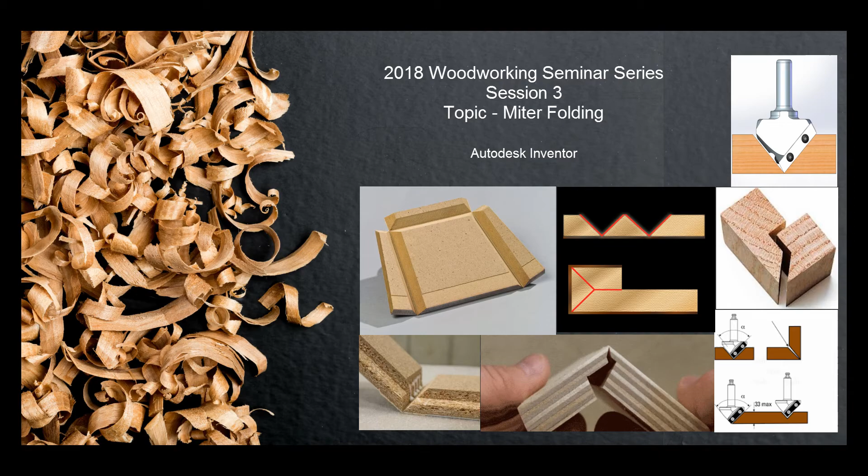Several years ago, I was asked to do a presentation on miter folding at one of the workshops. At that point, because of the earlier releases of Inventor, it was not as capable as it is today. Today I'm using Inventor 2018, whether it's professional or premium, it doesn't matter. In fact, this will work all the way down to 2015, I do believe.

And of course, now that 2019's out, again, it will work with 2019. The method I'm going to use is solid body modeling, because the end result is still going to be a single part that we want to machine.

The first type of miter folding I'm going to do is a straight 45-degree miter. When we start out, we have to make certain decisions, and I would say the most important one is the ability to be totally variable with information, so that whatever the condition comes about, we'll have the capability of changing it, modifying it, manipulating it.

So I'm going to start with 3 rectangles, and this will simulate the end grain, looking at the end grain of a single board.

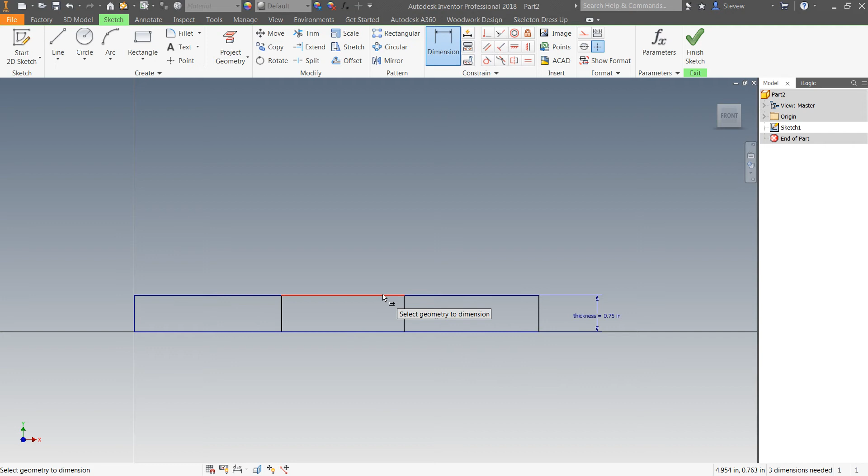Now, because I want to change it, and I'm going to use some iLogic here, I'm going to say thickness equals nominally 0.75, or 3/4 of an inch. I'm going to type in leg 1 equals, say, 3 inches. Leg 2 equals 3 inches. And leg 3 equals 3 inches. So there'll be 3 sections that will be folded on each other.

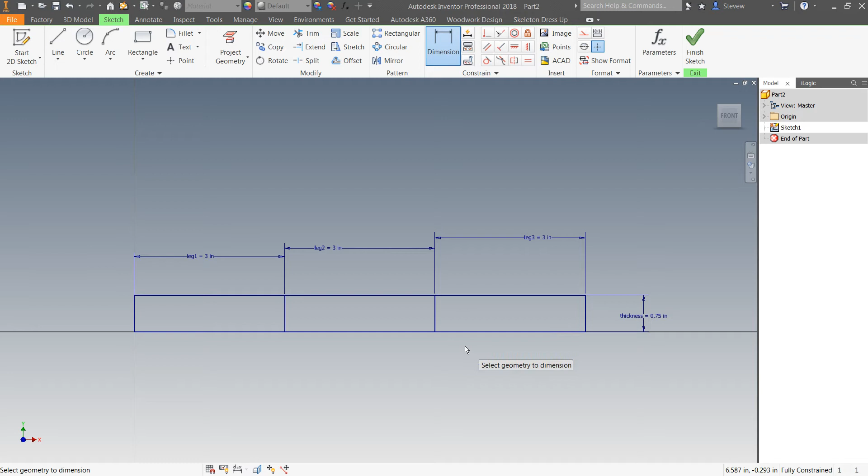That is the intent. I'll look at it in an isometric view or home view, and then extrude, let's say leg 1, and we'll say length equals, let's say 12 inches for the moment.

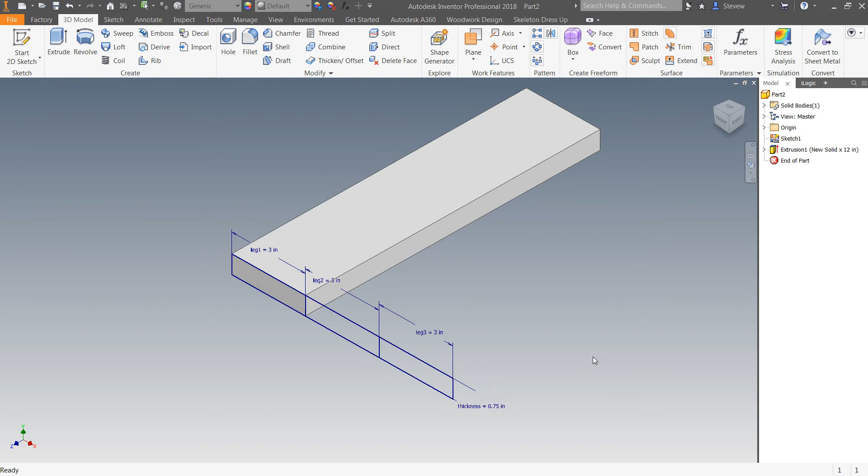I'll click on this and share the sketch and extrude, flip it the other way, use the parameter length, it's a new solid, and pick OK. Then extrude the final one, or leg 3, to length also, and pick OK.

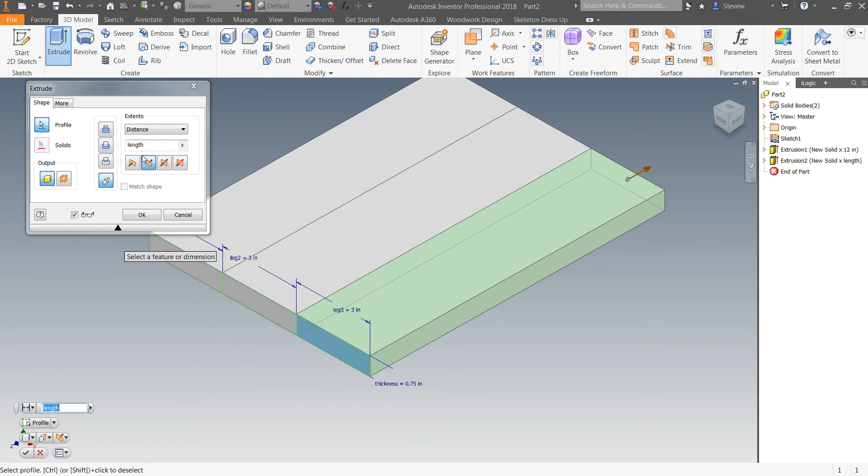So what we have here are three individual pieces of material. Well, really, they're not individual pieces of material. It's three separate solids, but it's one part. As we can see here in the browser, there are three solids, 1, 2, and 3.

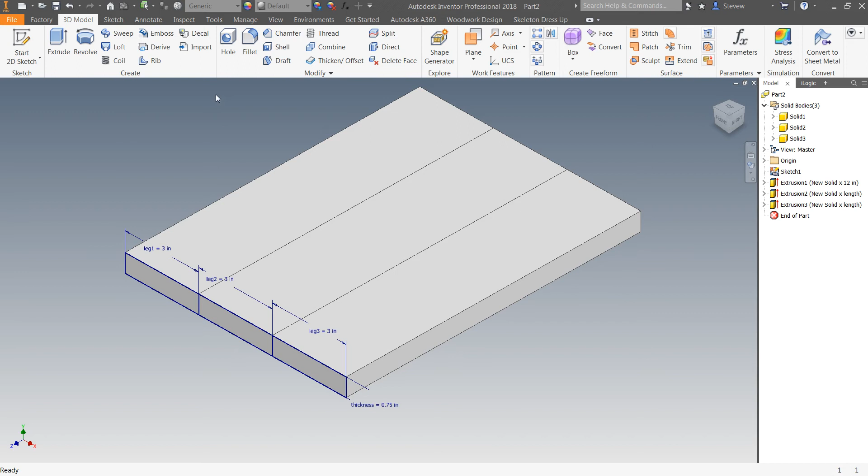One part. I'll also start now adding my angles. So I'm going to say chamfer, edge 1, and we'll chamfer it to thickness so that it will be equal to the thickness of the material, and pick apply, edge 2, and apply, edge 3, apply, and edge 4, and apply.

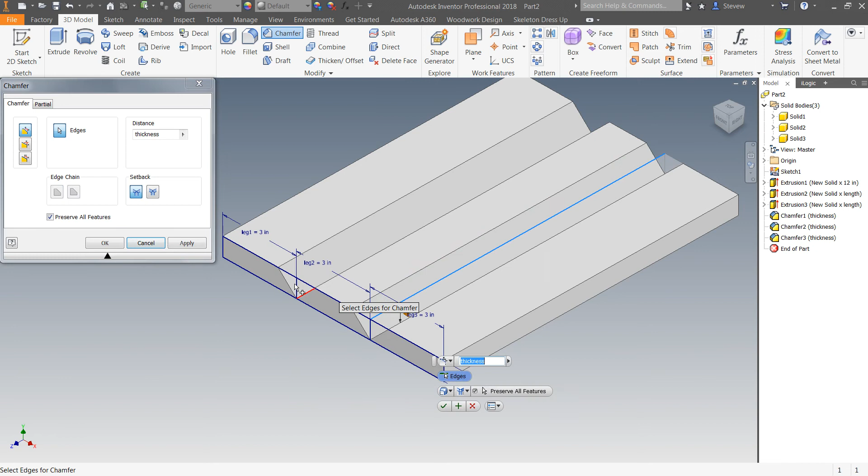And you can now see that we have three separate solid bodies with 45-degree angles, and of course, those are the ones that are going to be folded on each other. If I wanted a true box, then I would have done the outside and probably added a fourth leg.

I'll turn off the sketch, the shared sketch, in the browser, and pick Save, and give it a name. Let's call this Variable Miter Fold, and pick OK.

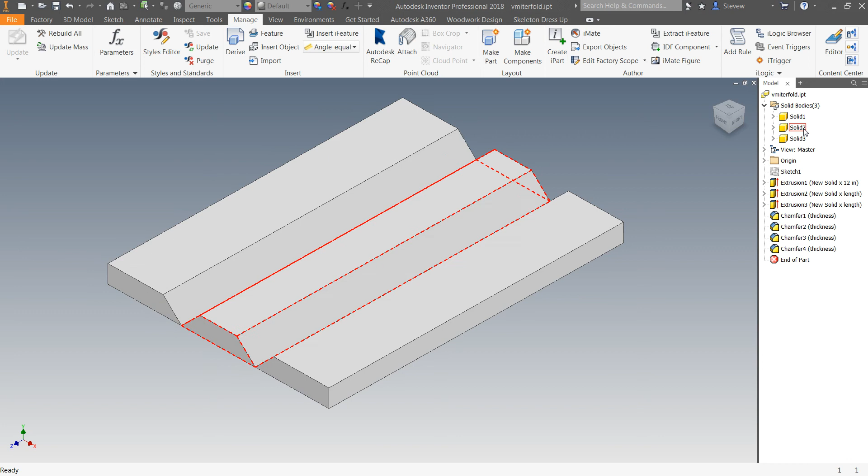My next step is to control what's going on here. So I want to control each of the legs, different lengths. I want to control the thickness of the material, and I want to control the length of the actual item itself here, the part. There are three solid bodies here, as you can see, and they're called solid 1, 2, and 3. Of course, I could rename them leg 1, leg 2, and leg 3.

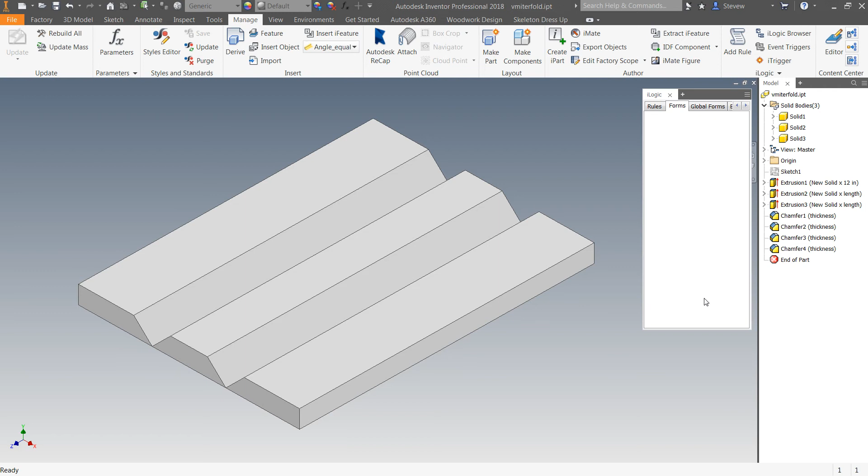Again, your call, based on the way that you might be using Inventor today. But I do want to start managing this, developing, utilizing it, because once I have this, it's going to be a library item that I can pull and utilize at any time for any project. So I'll go into Manage, and I'll go to iLogic, and the iLogic browser pops up. Sometimes the iLogic browser is sitting right on top of the normal browser, so you can see that you can toggle between the two. Now, I'll pull this out of dock so that we can work with this.

I'll go into Forms, right-click and add a form, and you can see here are my variables that I was using previously. So if I highlight my variables and drop them, you can see what has happened is I now have a dialog box that will control each of the items.

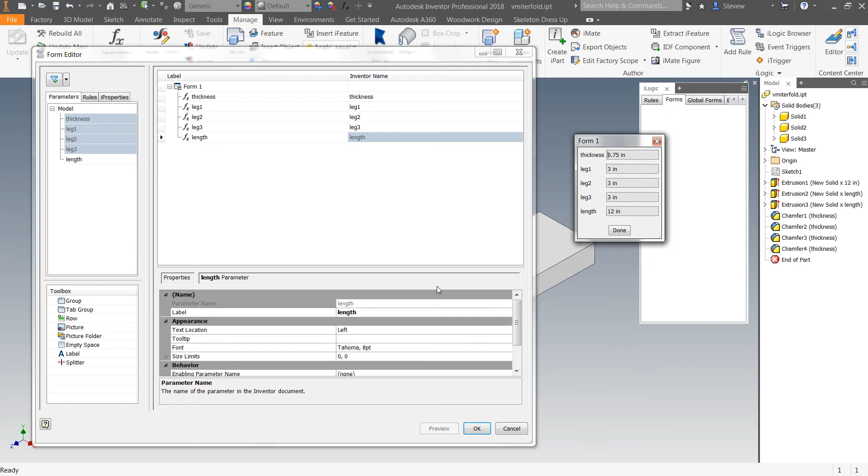Now I'm going to clean it up a little bit because I'm not comfortable with the way it's presenting. So I'll move thickness all the way down. I have leg 1, leg 2, leg 3, length and thickness, and I'll put a splitter after leg 3 so it looks a little bit better. And I pick OK.

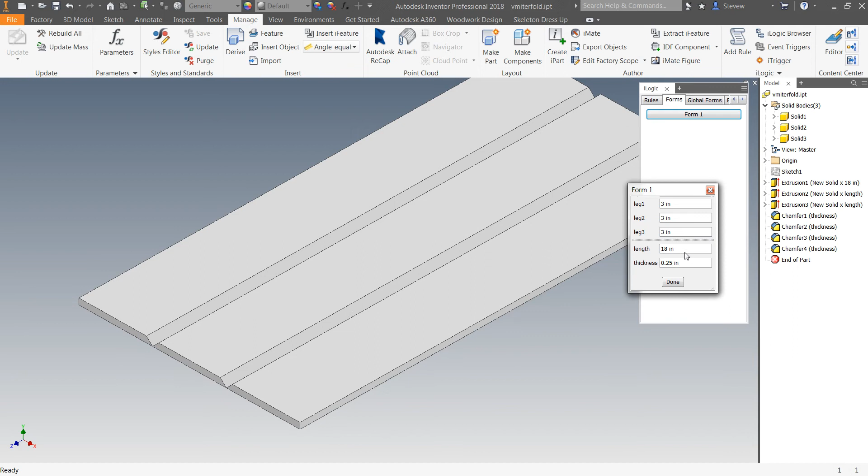And we'll just put it back for the moment. Move it back to 12 and move this to 0.75.

Once we have the actual core modeled, which is this one part that will have 3 legs, we now have to fold up one leg against another, or one solid body against another.

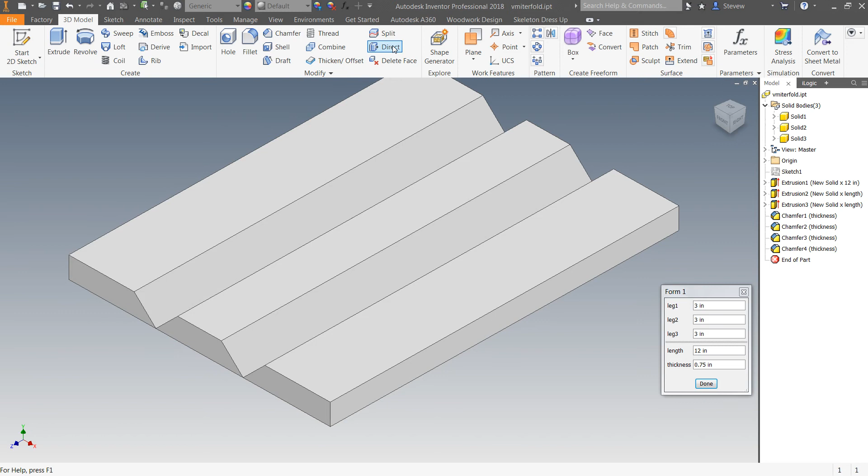The way it's done is simply using Direct Edit. The Direct Edit tool is found under 3D modeling, introduced a number of versions ago, a wonderful tool, and I use it quite often to accomplish tasks that were much more difficult and could only have been done in an assembly.

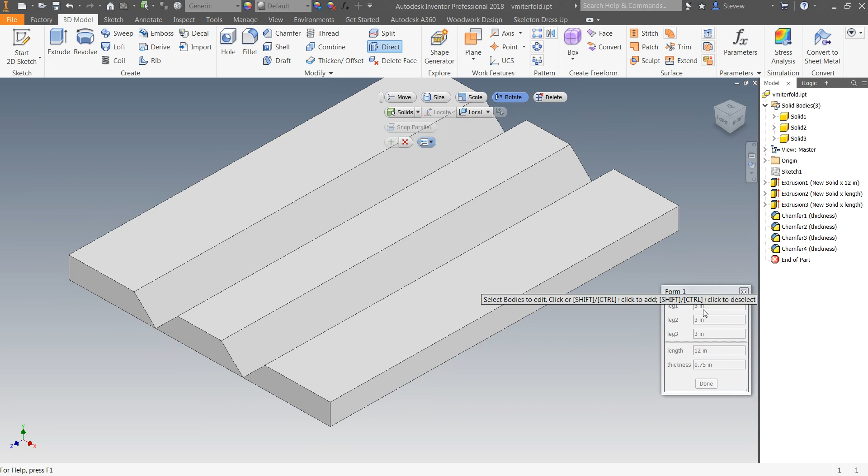So the first thing I'm going to decide upon is which of the solids is going to be stationary and which are going to be movable. In this particular situation, I'm going to just indicate that the middle leg will be the stationary solid. So I pick direct, I'm going to rotate something, and I'm going to rotate a solid rather than a face. I'm going to touch the solid that I want to rotate.

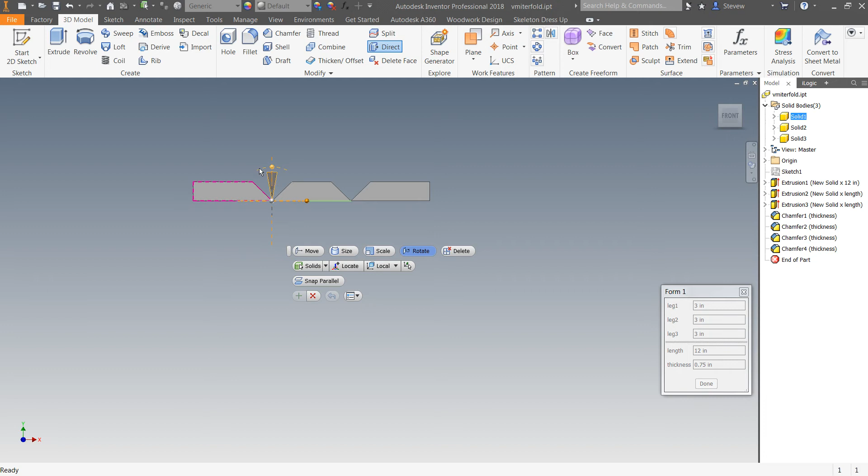I'll look at it from front view, and I'm going to locate the rotation point right at that vertice. Once I've done that, I can move my mouse onto these dashed lines, and they will allow me to just pull with my mouse so I can see I have correctly selected, and I'm going to type in the value that I want and pick OK.

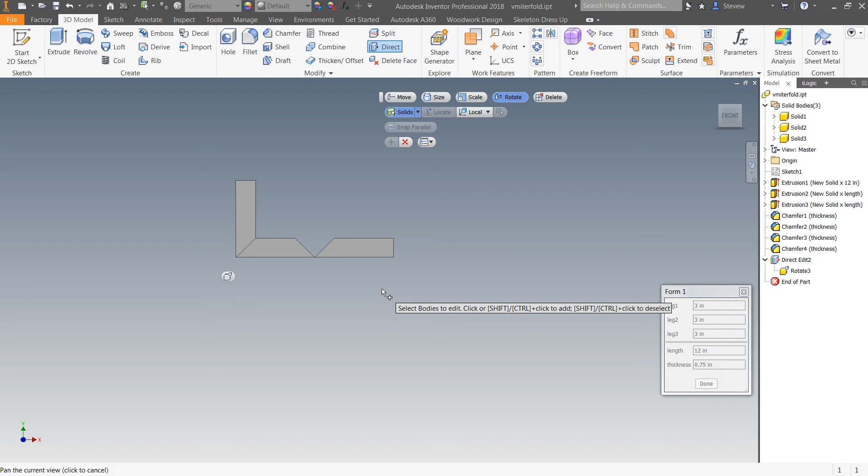Now that value can be a variable, and I can control it if I so desire. I'll go ahead and do exactly the same thing with the other piece. Locate the vertice point and rotate that 90 degrees and pick OK, or hit the plus sign. If I'm done with this, I can hit X and I'm out of the system.

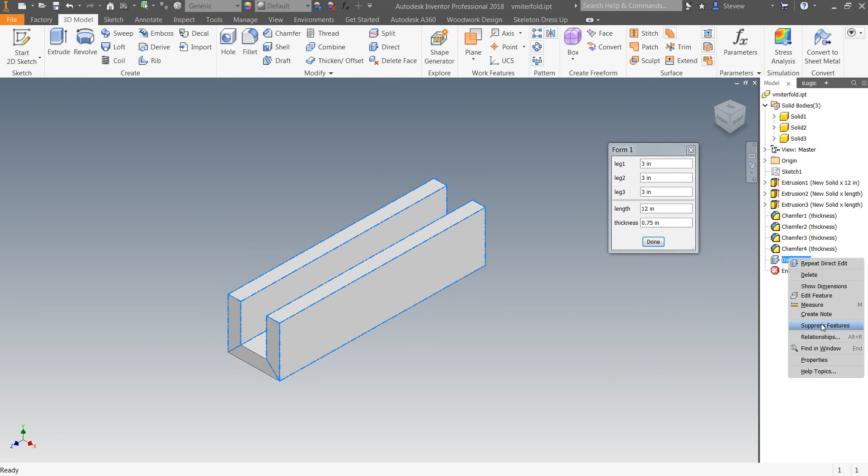Now, to test this, over in the browser you now have something called Direct Edit. If I right click on it and suppress it, it's going to open it up. So you start getting an idea of why I'm doing what I'm doing.

If we go ahead and unsuppress it, and we change the thickness from, let's say, 3/4 to 1/4 inch, you can see that everything works because I'm using the variable thickness on those chamfers.

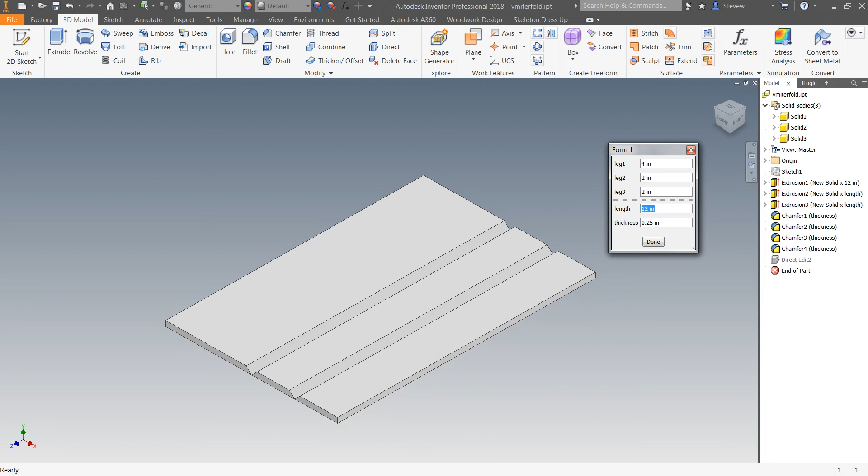If we go ahead and unfold it, like we've done before, and then it's correct. If we change the leg, let's change the center leg from 3 inches to 2 inches. Let's change leg 1 to 4 inches. Let's change leg 3 to 2 inches. You can see that I am changing everything. And then if I want to unsuppress the feature, it is correct.

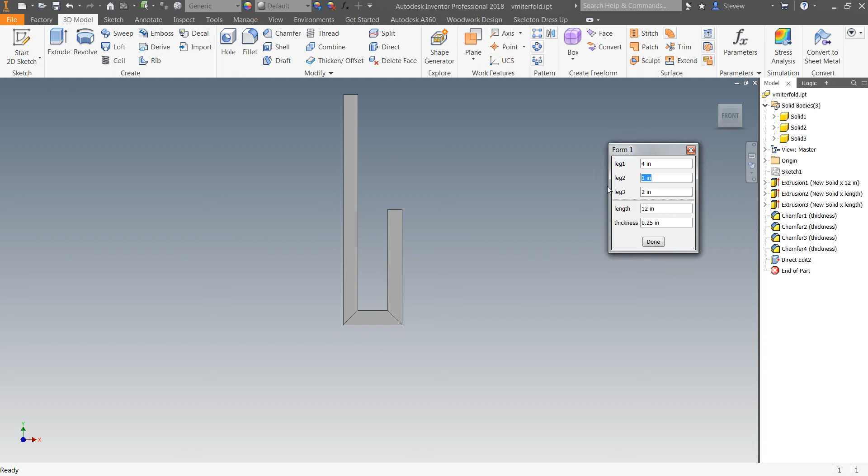In fact, if we take leg 2 and change it to 1 inch, let's go further with this, or change leg 2 to 0.5, I've folded it on itself.

This is one of those methods that we use when we start building with miter folding, because this is a seamless edge. How do I know? Well, you don't see it when everything is gray.

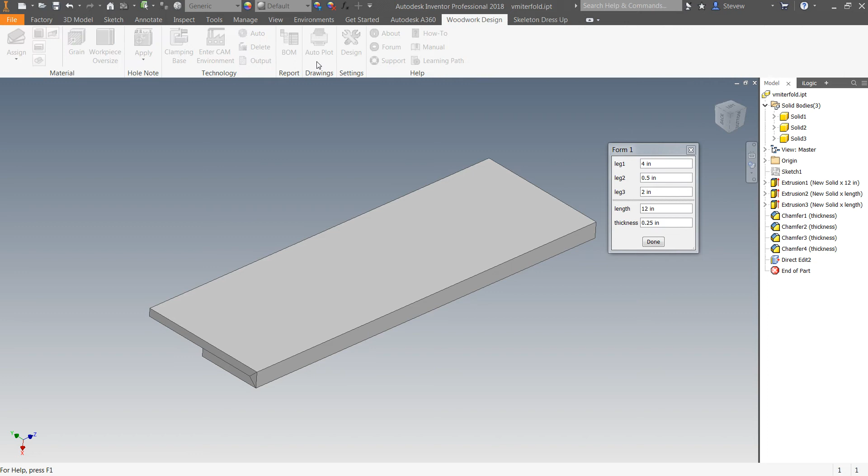Let me save my work, and I'll go into Woodwork Design, and I will assign some material to it. Let's assign bird's eye maple veneer to this.

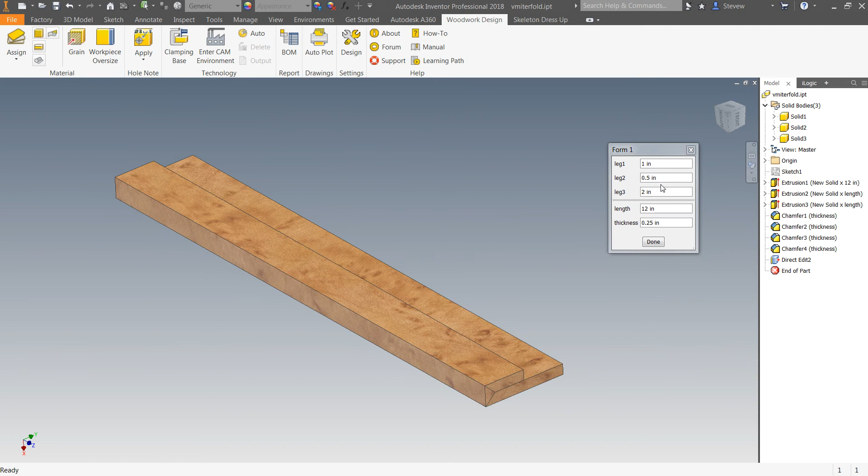This is a standard 45-degree miter fold, but we have many other options of miter folding. We have lock miters that we could implement this way, curved lock miters, spline lock miters. So it really is not too many limitations. What I like to do is show you the method we can implement to take a simple miter of this nature and enhance it even further.

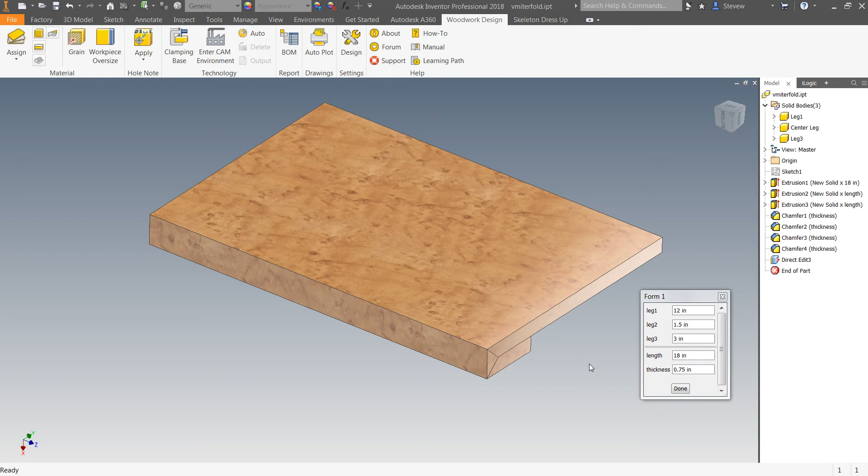So the first thing I'm going to do is put this back to a pretty straightforward 6 by 6 by 6 box, and I'm going to unfold it by suppressing the feature, and we'll come back to that in a little bit.

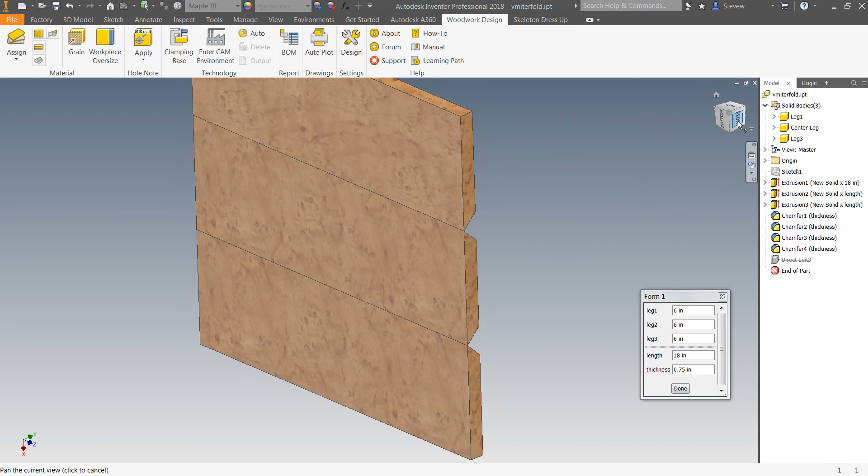So what we have here now is the end grain, and I'm going to consider the possibility of putting in lock miters. To create our lock miters, to start adding a little more surface area for gluing or registration, it's fairly simple. Depending on what your particular company does or what your design does, whether it's decorative, I've seen S-curved lock miters if that detail is going to be shown. There's variations of what one can do. What I'm going to do here is get started by creating my positive and negative shapes.

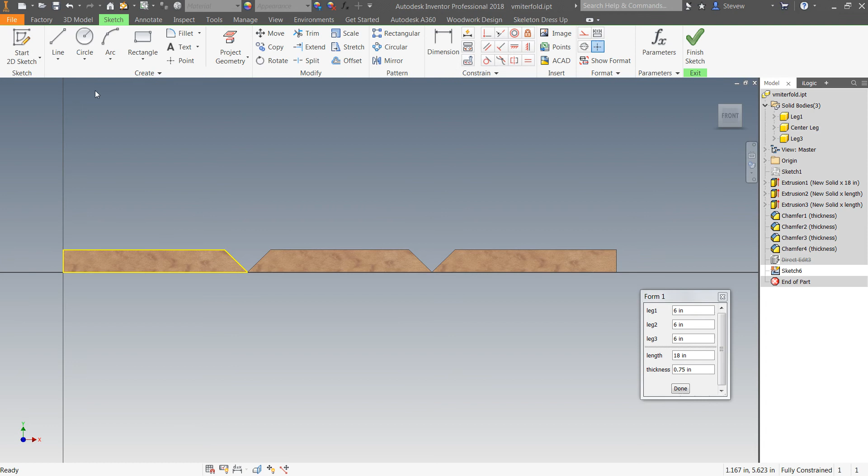So I'm going to create a sketch, and I'm going to draw a line from the midpoint. You can find the midpoint like so. And I'm going to extrude just that piece, and I'm going to cut all the way through the part.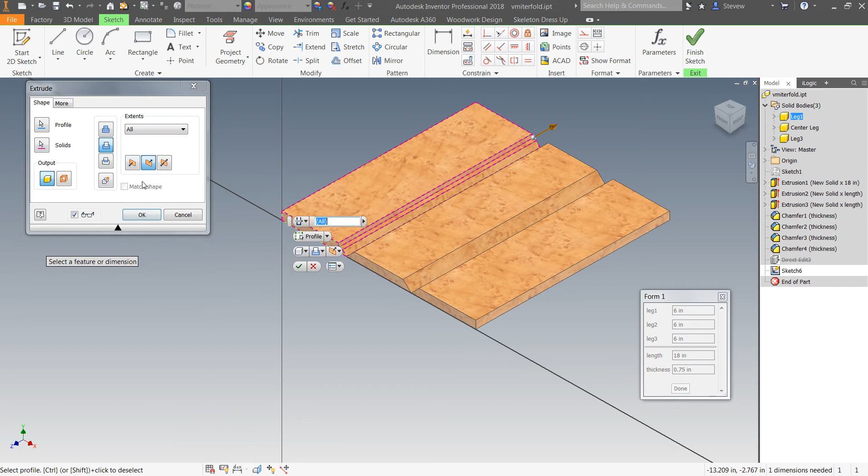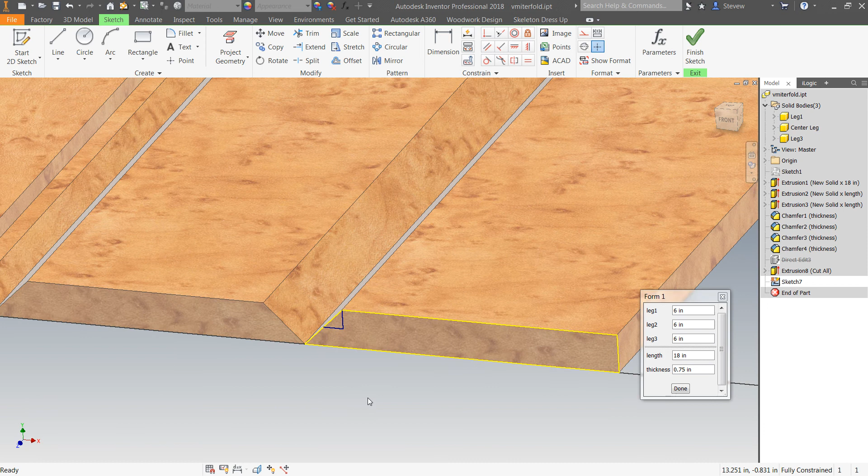I'm going to come over here, sketch on this piece, and draw a line from the midpoint across and up. The reason I'm doing that is because I want it to work no matter what the thickness of the material is, so I'm not even giving it a dimension. All I'm doing is saying midpoint to corner point. I'm going to cut, distance is all, and pick OK.

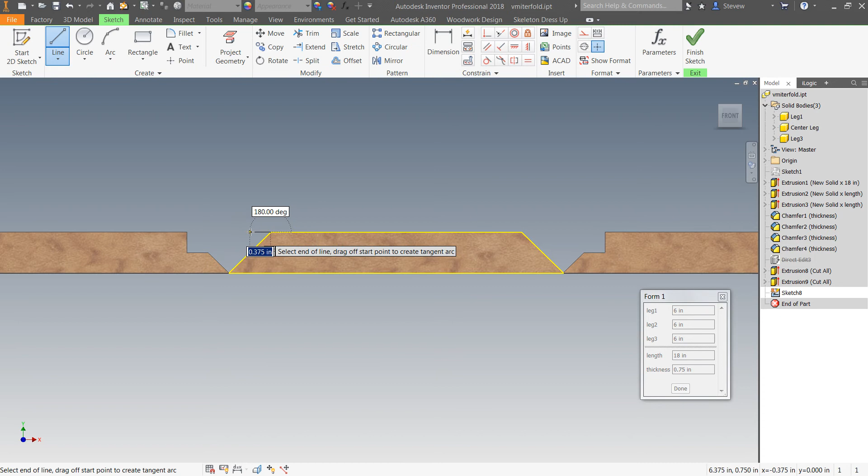So now what I have are the two outside edges. Now let's do the insides. If I go ahead and sketch on the inside, and let's draw a line from here, find the mid, pick, and do exactly the same here.

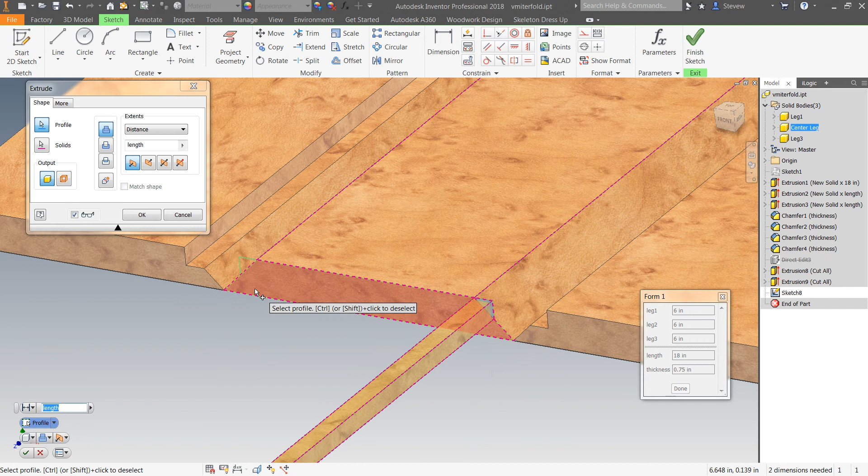Let's go ahead and rotate this around so we can see what I just did. I'm going to extrude this piece and that piece, flip it the other way, tell it the variable length, and pick OK. So these should lock into each other.

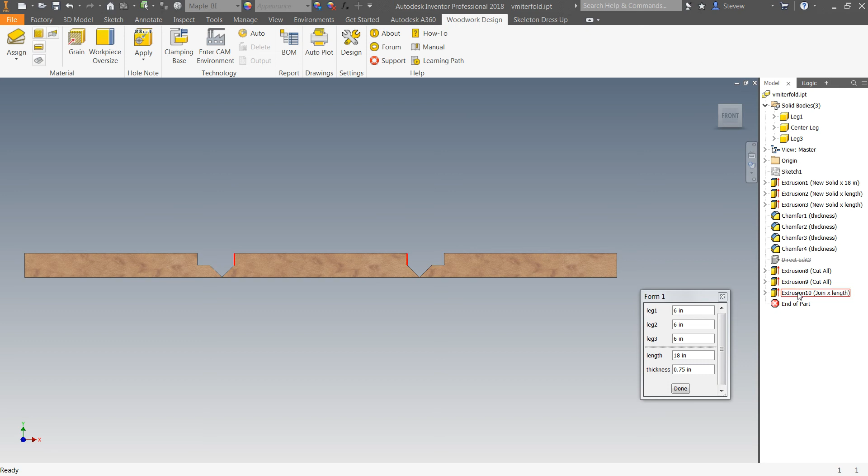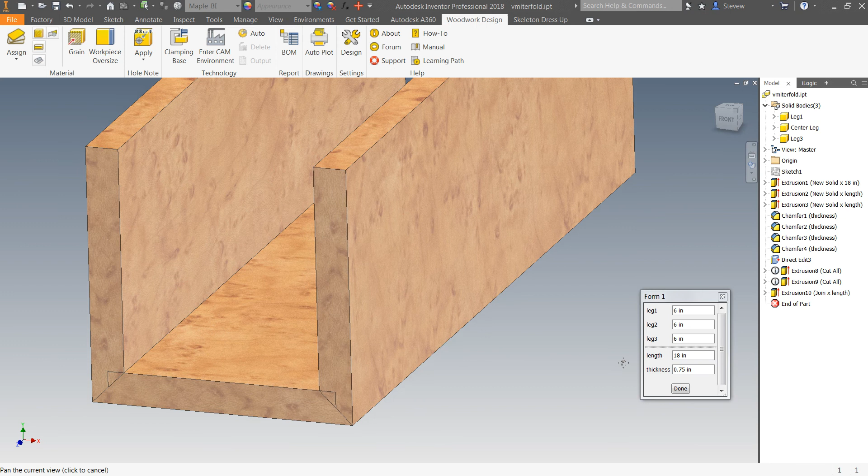Now the method you use here, or whatever the sketch is, that's completely up to you. Let's unsuppress the direct edit. You can see here are the last extrusions, the two cuts, and the one join. If I right click and unsuppress the feature and pick, oh, something's happening, and pick accept, okay, you can see there's some variation here that doesn't look right. You also notice over here there are some exclamation points saying there's a problem. Well, because we did these after it's been folded, that's where the problem comes in.

But if we take these last extrusions and move them up above direct edit, this is all cleaned up. So the order in which you do it is important, and this is just one way to accomplish that task. If we go back to direct edit and unsuppress it, you can see that that works just fine.

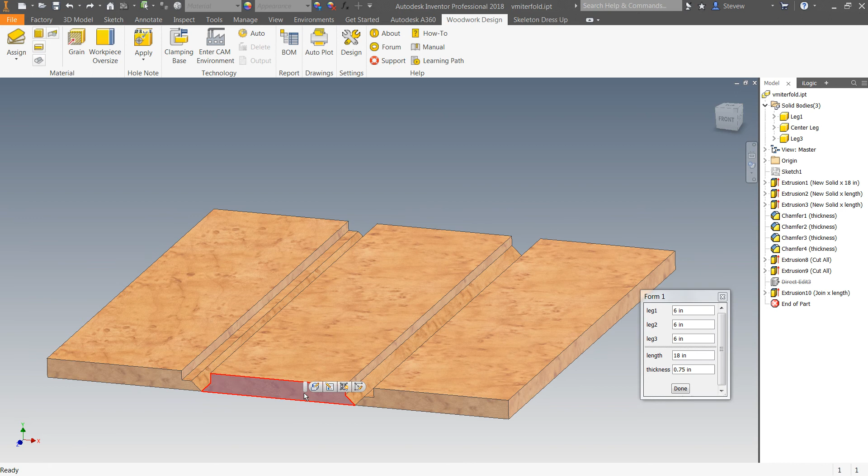I'm going to take this face and just change the appearance so it lights up a little differently. Let's make it black—sorry, let's change that face and make it a different color. Okay, unsuppress. Let's change this a little bit. Let's make leg 2 inches. And you can see what's happening here. And now we have a lock miter.

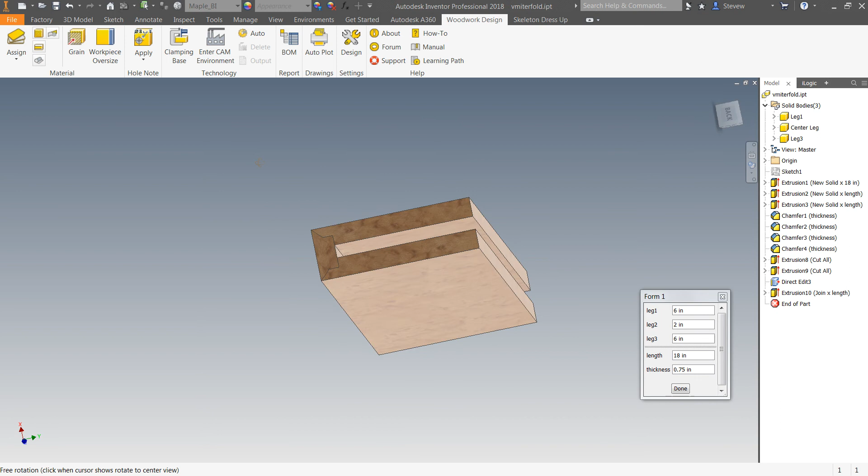I would now like to add the parameter for folding and unfolding right inside of this dialog box, because again, I'm going to want to use this as a library part where I can bring it in, tell it I want it folded or unfolded without going to the browser, so that every one of my team members can then take advantage of this tool. So right now, this is called Direct Edit 3, and maybe what I'm going to do is call this...

Okay, we can give it a different name if we want. We can call it Layout. Give it any name you want, okay? So if I right-click on Layout, I can suppress or unsuppress.

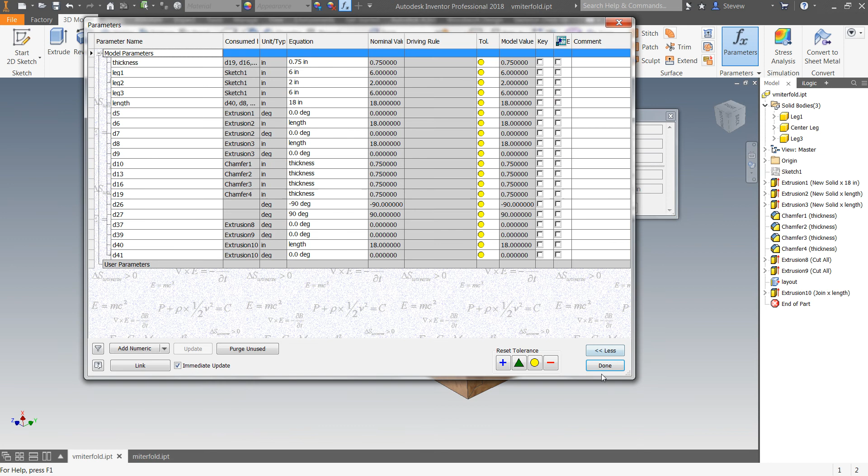Let's now go into parameters. Okay, so let's come back into modeling, go into parameters, and we can see here now what we've been doing. Okay, so thickness, leg 1, leg 2, leg 3, and length, of course, are options here. And what I'm going to do is also make them key fields so they will be able to be used downstream and be prompted for, whereas all these others maybe aren't as critical. But again, this is a choice we can make.

What I'm going to do is add a text field now. And the text field, I'm going to give it a name. I'll call it pattern.

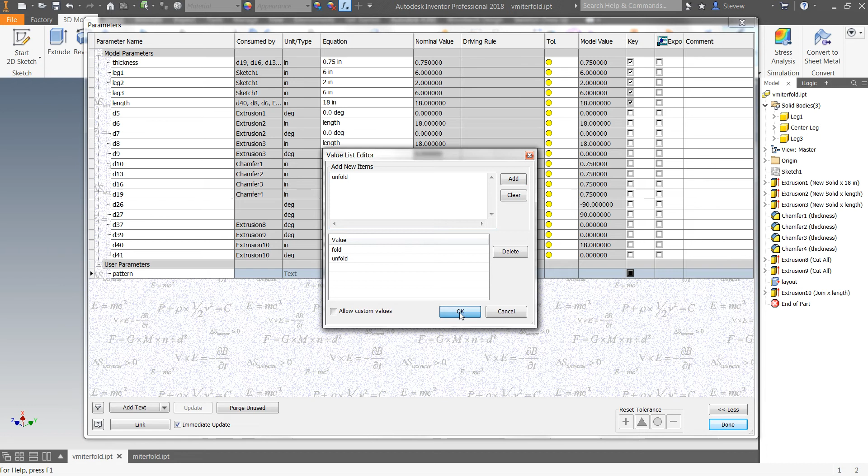I'll give it one option called fold. I'm going to right click and make it a multi-value field, and I'll give it another option called unfold, and pick OK. So now what I have is a parameter called pattern where it's a text field, and there are two options, fold and unfold.

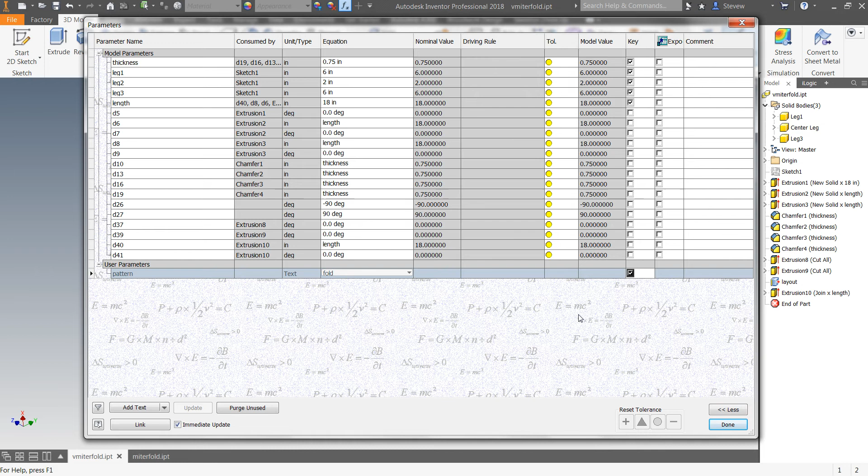Again, case sensitive, be careful here as we go further. Usually for part variables I use lowercase, and for global or assembly variables I use uppercase, but whichever makes the most sense to you as you're working through it. If this is the first time you're seeing this, there are lots and lots of tools. We've done many iLogic presentations in the past. I'll pick done.

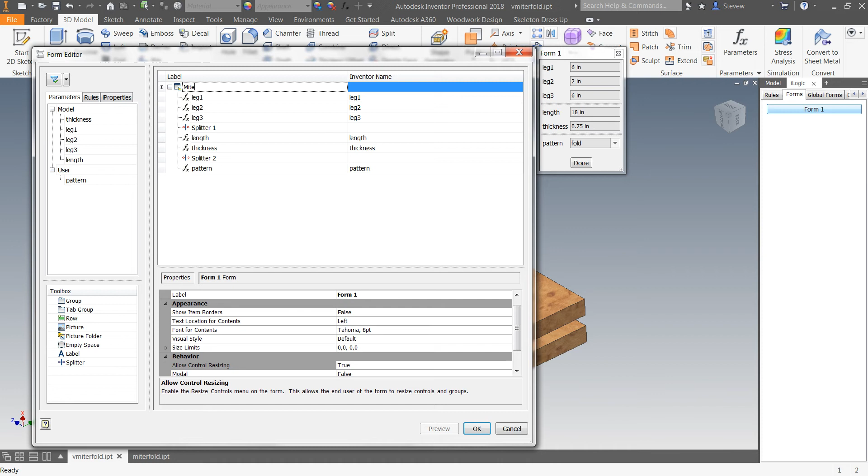Okay, and then if I go into iLogic, go to forms, edit the form, bring pattern in, you can see it's now here. Let's put a splitter above pattern, and let's give the form a name, and let's call it Miter folding. Pick OK. So now you can see it's called Miter folding, and what we have here is an option for fold and unfold, but it's not connected to anything yet, so it's not going to do anything at the moment.

Okay, the next step is to develop a rule associated with this new parameter. So we'll go into iLogic, into rules, right click, and add a rule. I'll call it Miter fold and pick OK. So at this level here, we've done many iLogic presentations, so...

The simplest way of doing this is to use an if-then statement, and I'll say if my expression, which is pattern, that's the variable name, equals one of the options was fold, lowercase, in quotes, then we can come down here and find the layout and say capture. Really all we want, I don't need the angles, but all I really need is to say features active. If pattern equals fold, then features active, and that's here.

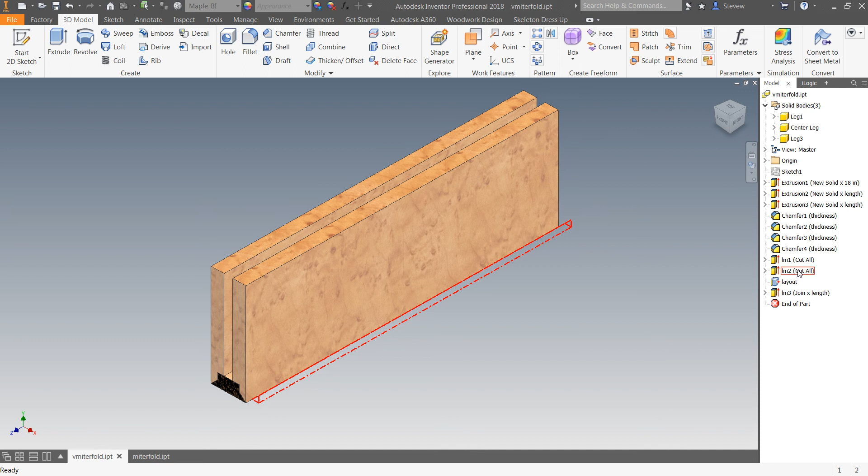LM2, lock miter 2, and LM3. The naming conventions really don't make much of a difference, just as long as you know what they mean. But if I now go over here and suppress these, you can see that the lock miter's gone. So what I want to do then is possibly do a similar situation.

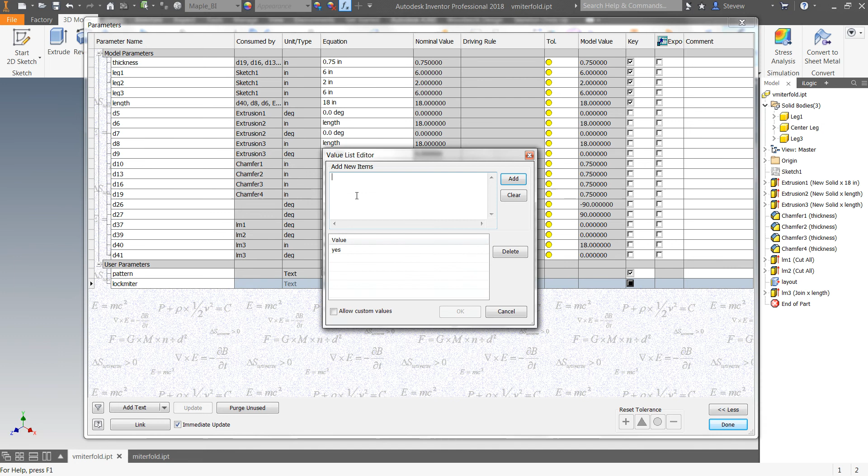So I'll go into parameters, add a text field, and this is going to be lock miter. And I'll say yes. Make it a multi-value field, no. So it's yes, no, and pick OK. So you can see here that now we have this option.

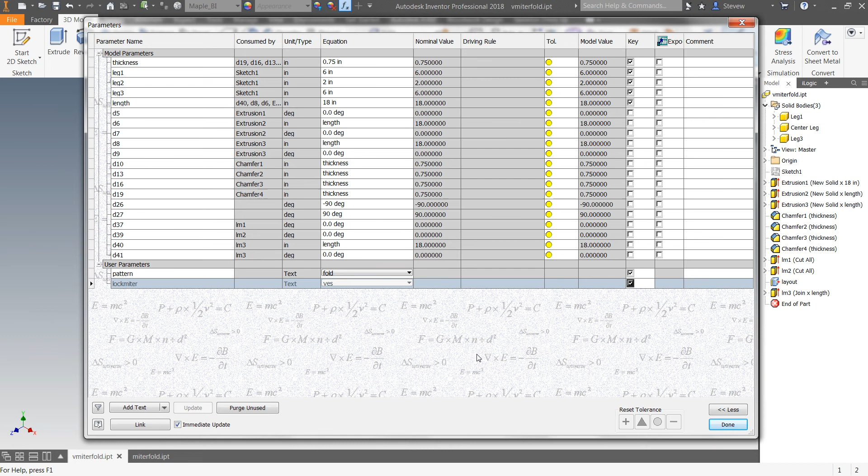Obviously, this could have been a true-false field, but maybe we're going to do some more with this downstream. I'm not sure, but again, there are multiple approaches. I'll pick done. I'll go into iLogic.

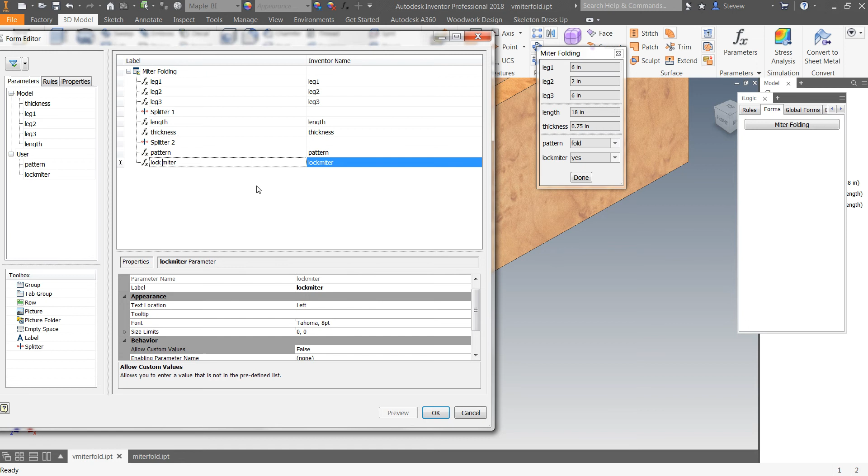I'm going to say go to the form, edit, bring lock miter in, and pick OK. Well, before I pick OK, I want to put a space there, so it looks a little cleaner over here. So now lock miter is an option, but of course it's not hooked to anything yet, so we need to hook it to something. I'll pick done or move on.

Okay, so the next thing is to write the rule. So for this to now be implemented within the dialog box, we have to write a rule. I'm going to create a new rule. I'll call it lock miter.

And similar to what we just did, we'll do an if-then statement. If lock miter equals, obviously you have to use a quote, yes,

Then let's go down to LM1 capture 1, LM2 capture, and LM3 capture. lock miter 1, 2, and 3, which we changed in the browser over here on the right. It puts notes in here, you know, that's what the apostrophe is for. Do we need them? Sometimes it's nice to see where it's coming from, and it helps explain the code a little bit better. I don't need to change some of these other things.

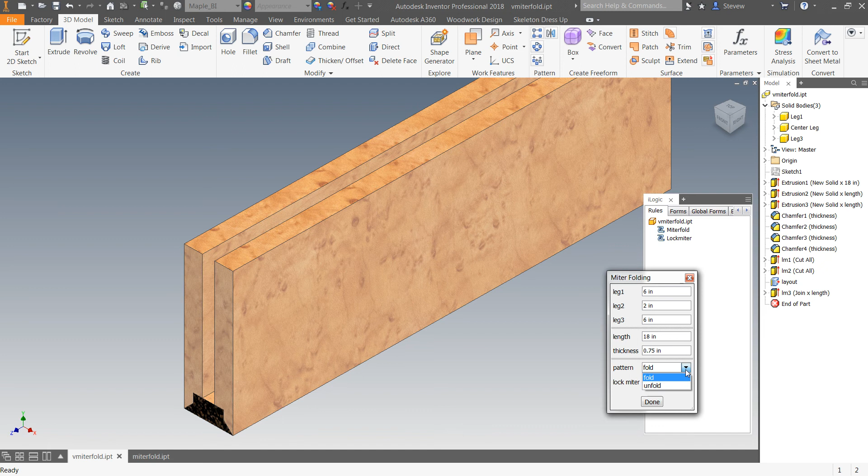Pick Save and Close. So let's see how this works, if it works. Pattern unfold, yes. Fold it. lock miter, no. Yep, lock miter, yes. Unfold. lock miter, no. Works pretty good. Let's back it up and fold it, and pick and save our work.

So now that we've created this, I want to use this in the real world, okay? I want to bring this into cabinets. I want to use this as shelves. I want to use this as rails. I want to use this for whatever purpose we might have. Maybe it's going to be just for columns, simple columns, or for beams, decorative beams. Hundreds and hundreds of uses.

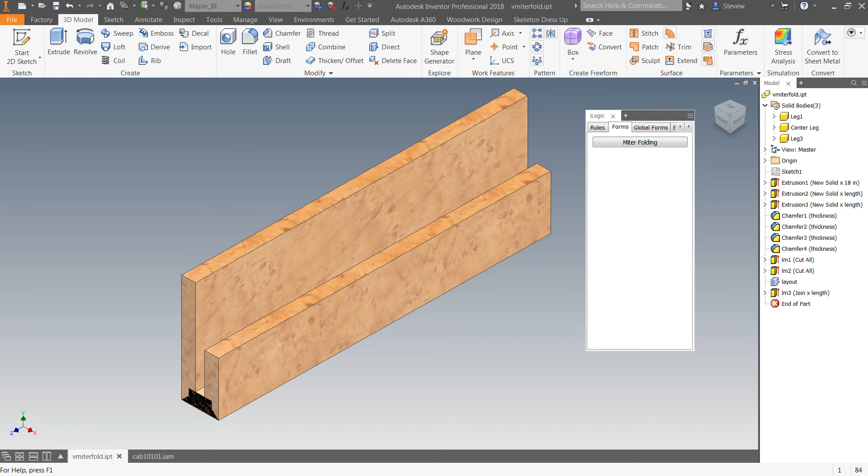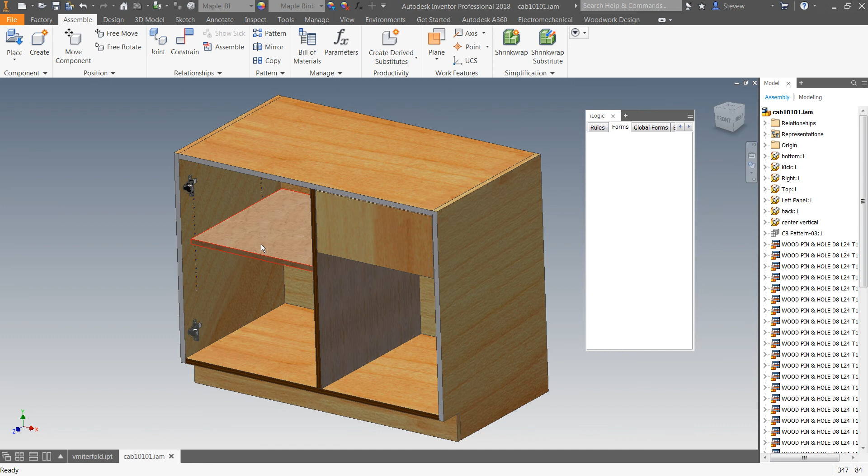I want it to be 2 inches or 3 inches, or I need it supported differently. And I'm going to use what I did in this variable miter folded part to build shelves. So I'm going to turn this shelf off, and let's measure this cabinet. So the distance from one side wall to the other is 21 inches.

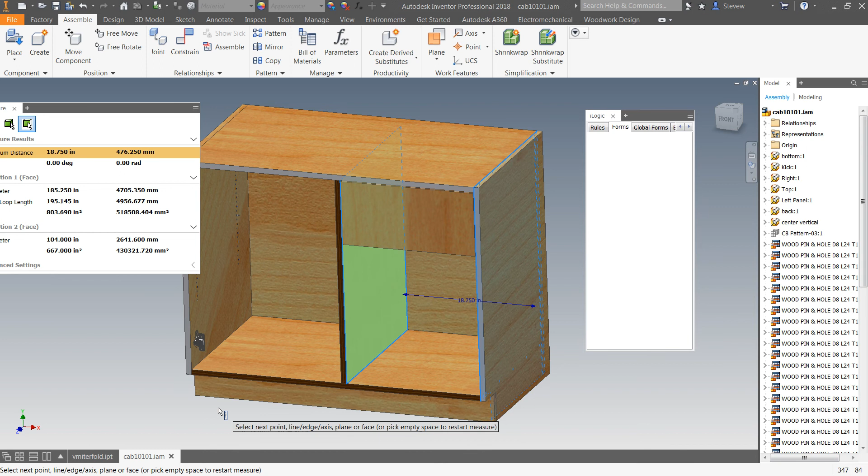Okay, let's go ahead and do the same thing on the right side. From here to there, that's 18.75. So those are the two dimensional values that are important. And then I'm also going to say the depth of the cabinet is 23 inches, so it's a 23-inch depth.

So if we were going to put in a shelf here, the width of the shelf, let's say we want the 1/8 inch clearance on both sides, that should have been 20.75. That's the width on this side, and the width on this side would be 18.5. So those would be the two. And 23-inch depth, well, I'm going to take 2 inches off of that because of an inset door. So the depth of the cabinet will be 21 inches, 21-inch depth.

Okay, now that we know approximately what we want, I need to put a shelf in left and right using the same item, the same part, and not affect it - not by putting one in does it affect the other. So I won't use place, but I'll use place iLogic. I'll find the variable miter folded part.

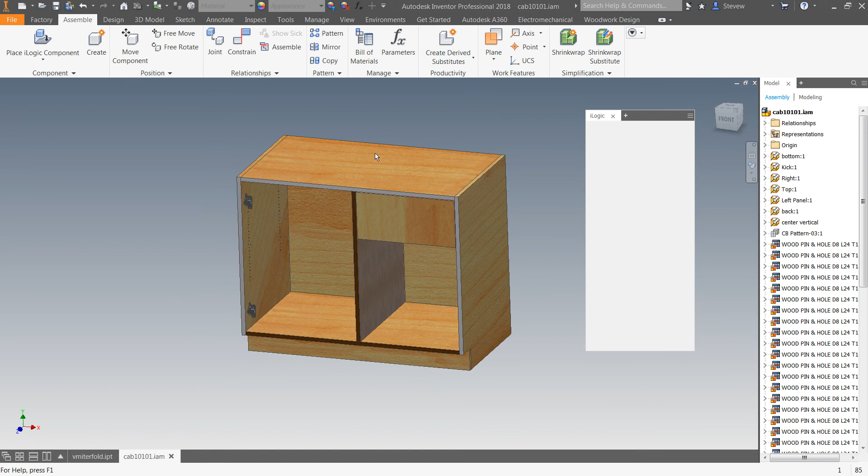The major difference is I'm using place by iLogic. When I place by iLogic, you'll get 3 windows in your world. Window 1 is the assembly. Window 2 is the part that we're bringing in, the variable part, and number 3 are the values. Remember what I had done? I had clicked on key fields, and that's what's showing up here.

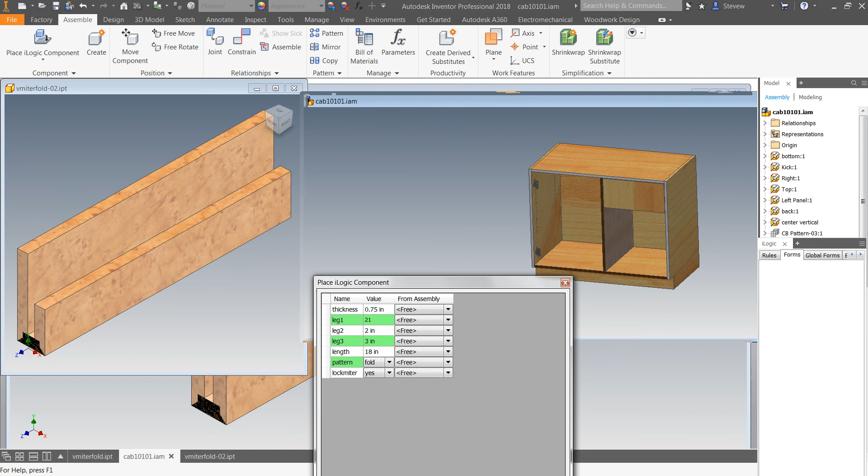So the first thing to consider is leg 1, which will be the top of the shelf, is not 6 inches, okay? The depth of the cabinet is 21, so I'm going to want that to be 21 inches. And you can see that this is just changed to 21 inches. Leg 2, which is going to demonstrate itself as the thickness of the material, is set to 2 inches right now. And if we wanted it to 3 inches, you can see it's changing in the dialog box over here on the left-hand side, or the window.

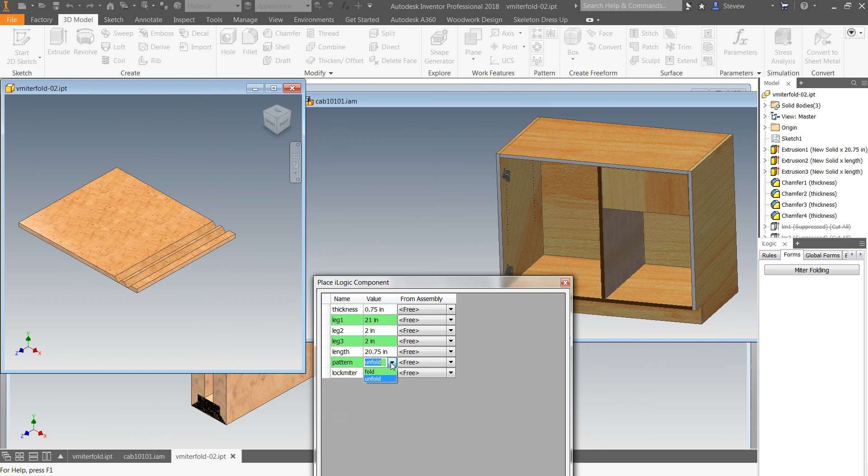Leg 3, I'm only going to go 2 inches back, save material, and the overall length of this is going to be 20.75. And it won't have a lock miter - you could see that it went away. And if for whatever reason I want it unfolded, of course I could have it unfolded now or whenever. Okay, I pick OK, and I bring it in, and pick OK.

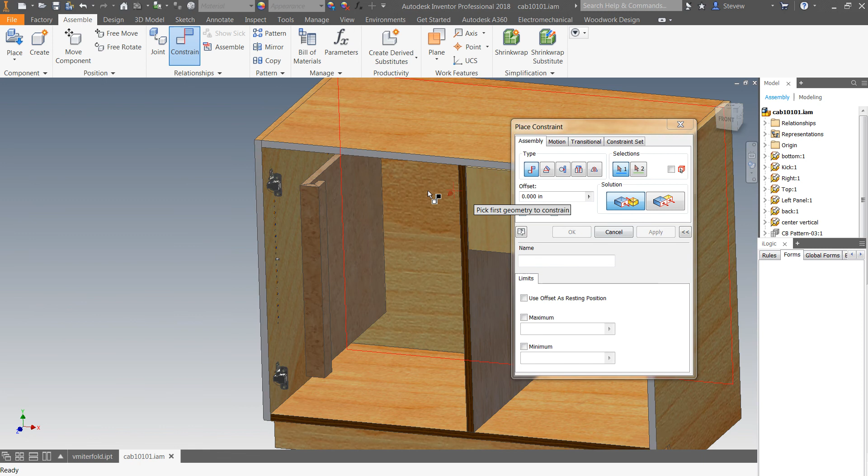So what I now have is the first piece brought into the system, and I'm going to constrain it. Now there's quicker ways of doing this, but for what we're going to do today, that's fine. And we're going to say that this side here, okay, is 1/8 of an inch from that wall, .125.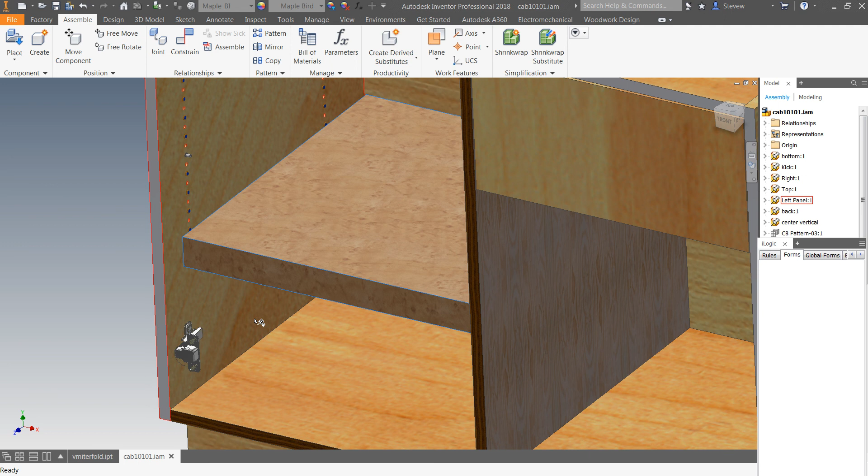Let's look at it from a front view, and you can see that the clearances are perfect. I just have to put the shelf pins in. Nice clean edge, it looks like a solid material, and I saved a whole bunch of time and expense. And this won't warp on me. Okay, let's do the other side now.

I'm going to say Place, iLogic. I'm going to grab the same item, exactly the same thing as I had done before. This time I'm going to keep the lock miter. I'm going to say the length of it is not, it's 18.5.

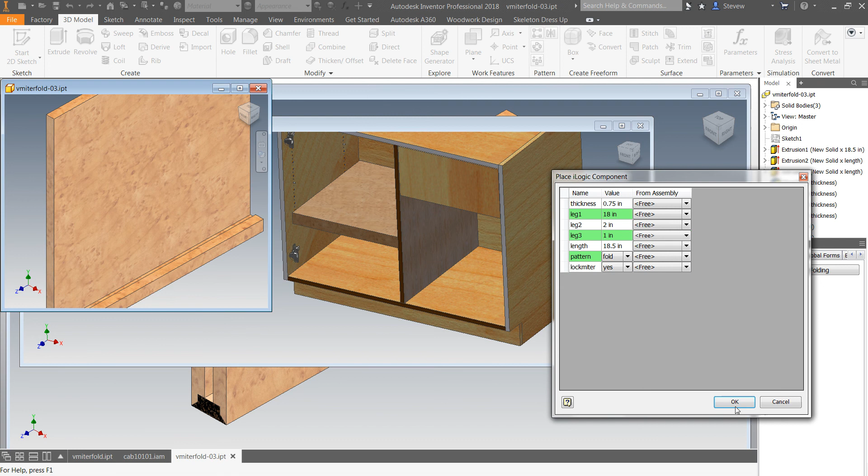I'm going to say that the top leg is not going to be 23 inches in depth, I'm going to say it's 18 inches in depth. So I'm changing this just to show you that we can. And what else do we want to do? Let's say this leg here is going to be 1 inch. And pick OK, and place it.

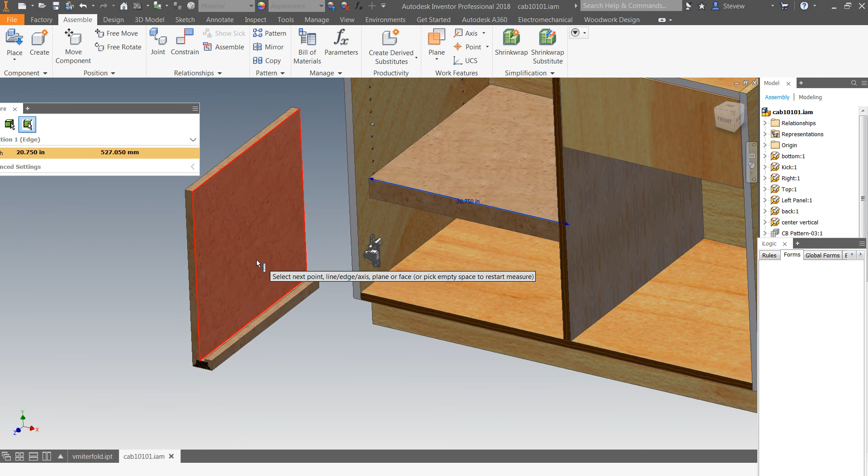So this one has a lock miter, that one doesn't have a lock miter. The measurement on this is 18.5, where the measurement on here is 20 3/4. So what's going on here is I'm using the same library part over and over again, and it has different values to it.

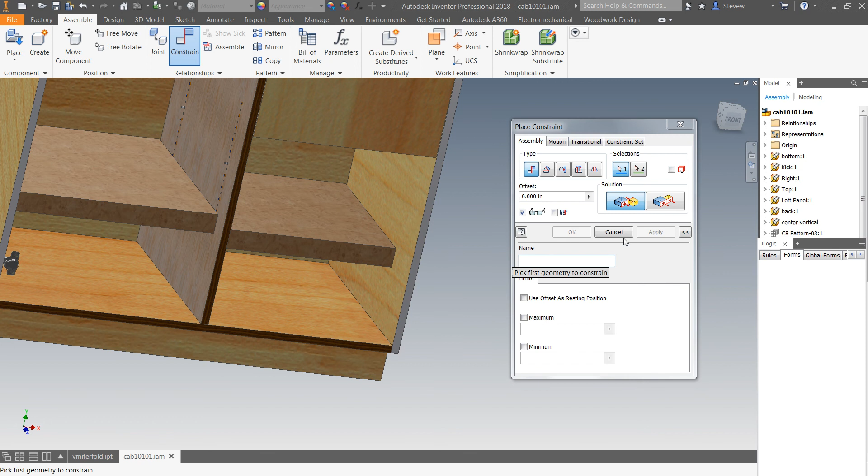So this is build at will. Let's make that 1/8 of an inch, 0.125, and hit cancel. Looking at this now, you can see here is shelf A and shelf B. Now you say to yourself, well, this shelf B is too thick, I want it to look thinner. So all I have to do is double click on it, go into miter folding, and change the leg, this middle leg, from 2 inches to 1.5, and pick done. So I'm now adjusting that leg.

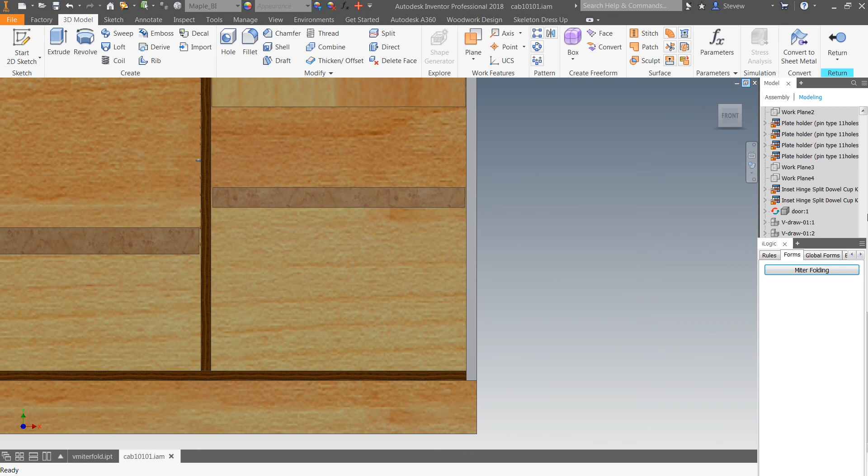What's going on here is that from the one library part, I can create infinite variations of it with infinite variability that you might consider. So as we look at possibilities, the sides, the top, all can have the same kinds of conditions applied to that if we want.

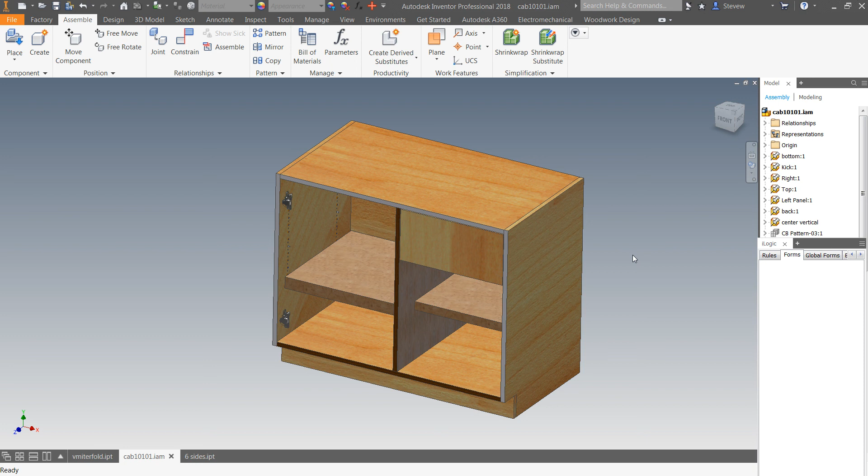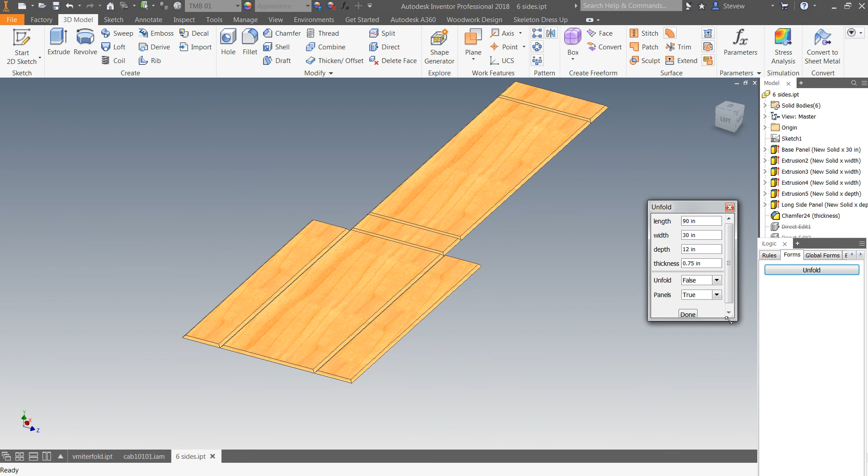Now, I've only done a 3-sided part, that's all I presented to you. But I'm going to go to a 6-sided part that I've just created. It's more of the same, but if we take a look at this, it's a little bit different than what I've done before, because I've got miters all the way around, on 1, 2, 3, 4, 5, 6 parts. In something like this, everything's adjustable.

It's overall now. So if we say the length of this is not 90 inches, it's 70 inches. It's 70 inches because I'm not really thinking of it as a flat, I'm thinking of it as a folded part. Well, it's a box, it's a true box. So if we look at this, let's just look at it in a half section.

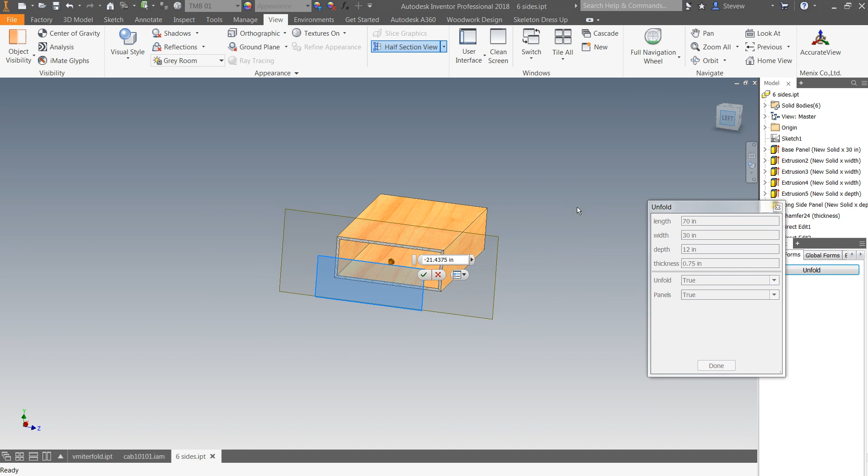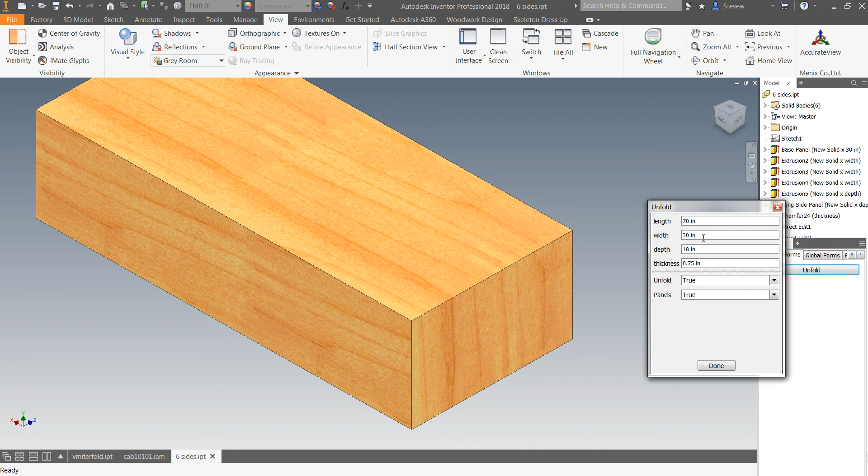You can see that in section, it's all mitered. It's hollow, of course. And it gives me the ability to change. Now, again, the thickness of the box, 3/4, the depth, the width, the length. And if I say I want to change the depth of the box to 18 inches, that's a perfectly hard edge box. If we want to change the width to 22, of course, all of that's happening. And then when I do an unfold, it's unfolded.

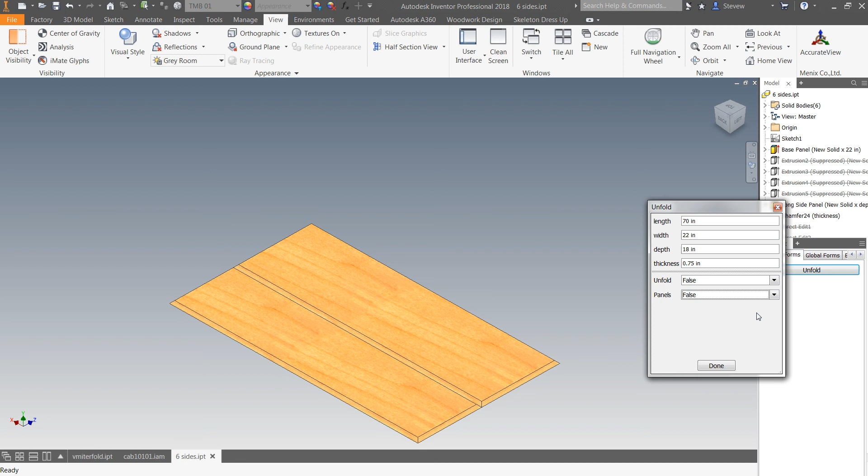What's also interesting about this is I can start with a 6-panel box and say, I just want 2. So even from multi-bodies, I am now controlling what bodies I see. So that 3-sided unit that I started with today, that could have been a 4, a 5, a 6. It could have been an octagon. Again, it's a matter of what makes the most sense for the kind of work you're doing.

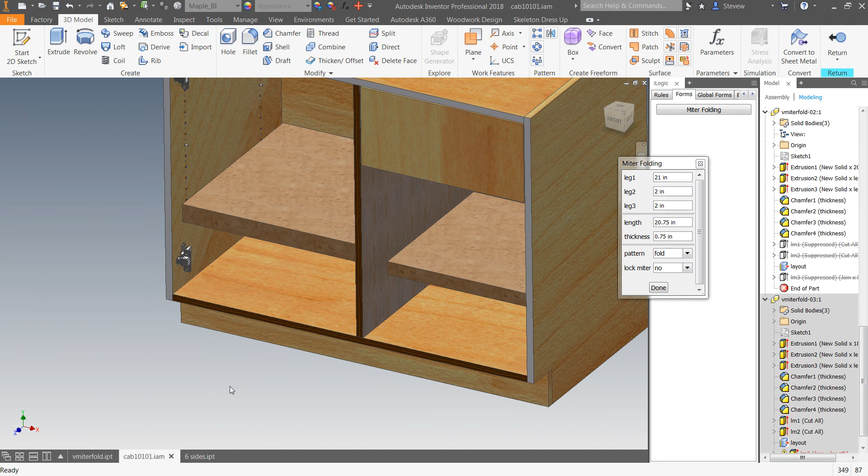If we go back to the assembly, we have the ability now to control each of the shelves, or if it's a rail or a stile or a panel, totally independently, or they could be linked together. So if you change one, it changes the other, just as a normal part would be. They can be copied and pasted, just like any other part. But the benefit we always saw when we develop in this fashion is that if I select a shelf and sketched on it, and then drew whatever sketch and did any kind of feature, it would only affect that one shelf, none of the others. So some dramatic benefits in the way that you create, so that you can do these things on the fly.